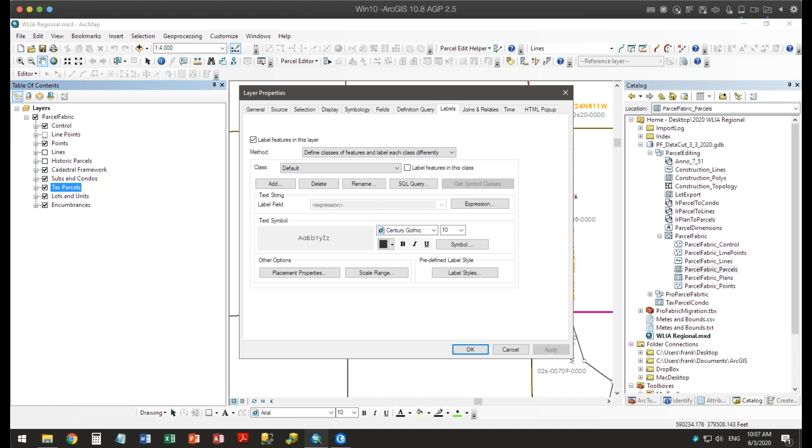All right, so then the question becomes, well, if you have this one layer of nothing but polygons, how can I split that out? And the reality is that in the table of contents, you'll see here's your control points, here's your line points, here's your fabric points and your fabric lines, and then everything else below that are actually polygons, but those polygons have definition queries against them. So if we look at the definition query, this layer here, the tax parcels, actually says that the system end date is null and the type is equal to 7.

And that should give you your first clue that, in fact, the way that you differentiate between the different types of polygons inside of an ArcMap parcel fabric is by an attribute field called type. That attribute field has a domain on it, and that domain is actually stored in the geodatabase, and it's the type field. And here are the various types in the local government information model.

Type number 1 is a PLSS township, 2 is a section, 3 is a quarter section, 4 is a special survey, 5 is simultaneous conveyances, 6 is conveyance division, 7 is tax, 8 is ownership, 9 is encumbrance, 10 is separated right, and 11 is other. Actually, this definition is a result of some work that's been done by some federal committees, and it's sort of documented inside of Nancy von Meyer's GIS and land records book, and that's where they pulled this from. It's a very good data model.

However, because it was developed on a federal level, there's always nuances as far as things that don't necessarily fit local. For example, inside of here, there is a thing called a simultaneous conveyance. A simultaneous conveyance is in fact a parcel of land that has been divided by a private landowner so that they could split it out. And the simultaneous conveyance part of it is the fact that it is defined by a drawing, a graphic drawing that's stored on local government. It is a subdivision plat. It is a survey of some sort, a plan of how these individual areas inside of there should be split up.

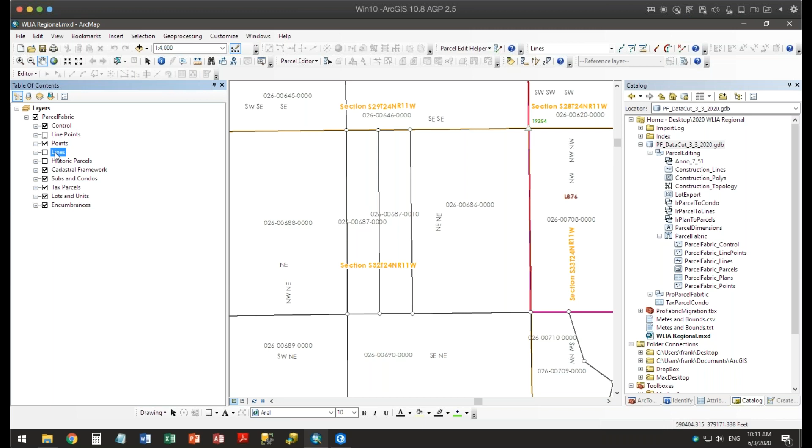And then to break this down further, the way things fit together inside of the ArcMap parcel fabric is that the points, the lines, and the polygons are all related to one another. I should actually say the plan tables are also related. And there's actually a series of relationships, and you'll see them over here in our catalog area, where there's a relationship between the parcels and the lines, and a relationship with the plans and the parcels and such. Many of the other relationships are hidden in here. But the way this works is that the line layer, let's go in and open this up just to show it.

The line layer has a series of attributes, but most importantly is this first one here. All right. This first one here is the parcel ID. This attribute contains a link. So it tells us that, in fact, this is going to the parcel that has an ID of 1.

And as you go down through this, you'll see all the others in here. So this says that this line goes with parcel number 1. And then it says what the sequence is of this line. So this is the first line inside of the one that goes with parcels, and you can see it goes all the way down here. In this case, that's a big parcel. It has 277 lines associated with it.

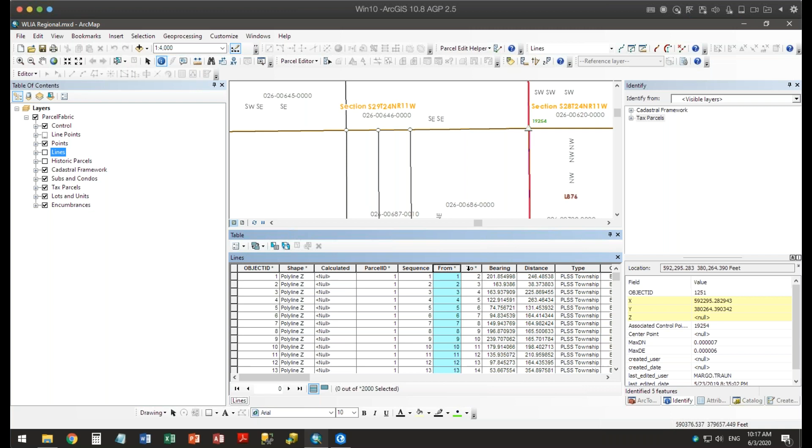So there's good things and there's bad things about this data structure. Another bad thing about it is that while every polygon, every tax parcel probably should have its own set of lines, because that deed only describes that one parcel, what happens when you have a subdivision or a CSM? Because the way those are created is just with a single line describing the split between the two.

Same way with the public land survey systems. They are actually simultaneous conveyances, but they are of a federal level, not a private level. So they wind up having a lot of extra lines in them, kept on top of one another over and over again. So there's efficiencies in the structure, but there's also inefficiencies built in. All right, are there any questions or any comments about the ArcMap parcel fabric before I start describing what the ArcGIS parcel fabric looks like?

Anything in here? Okay. Nothing yet.

All right, so now what we're going to do is we're going to go over to ArcGIS Pro, and inside of here, this is the same structure with the fabric inside of ArcGIS Pro. All right.

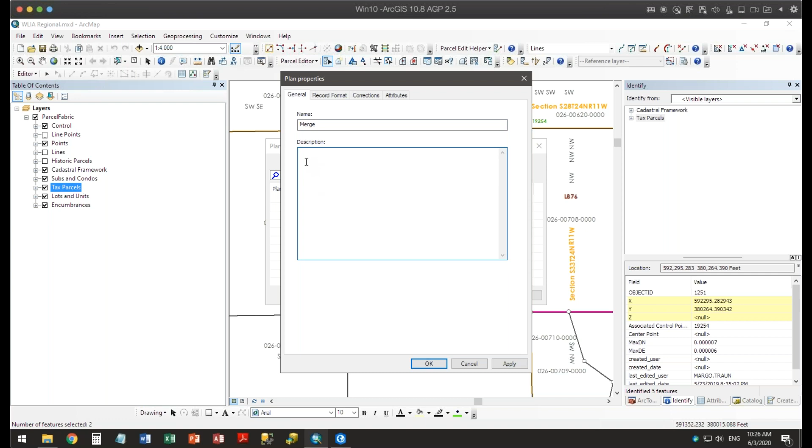Now, the first thing I want to do is create a reference, a plan to say how I want to do this. So I'll go to plan and create a plan. And this will be my merge plan. I can put the description in, what the format is of it. In this case, it's a quadrant bearing, degrees, minutes, and seconds, acres. I can put all sorts of attribution on there, but it's a plan. And that plan is then used to reference anything else that I create with it. So I'll set that as my active plan.

And then on here, I have a whole series of things that I can check. For example, if I want to create a new number for that plan in the name field, I can type it in here. If I wish to use one of the existing ones, I can click on one of these and use this instead. So that's one option there.

If I don't want to mark these parcels as historic, maybe I'm doing this to just fix something. Maybe they should have been the same, or maybe one of these is a sliver. I can check this here and say, don't mark these original ones that I've selected as historic, just sort of throw them away. That's what this means.

And then finally, we have another option down here on the bottom. It says change it to a different template, meaning take these two tax parcels and when I merge them together, make them something else, for example, a subdivision or CSM polygon instead. So inside of what looks like a very simple dialog box, we have a lot of different options. And those of us that have used this can kind of understand what this is. Well, let me go back over here to ArcMap and do exactly that same thing.

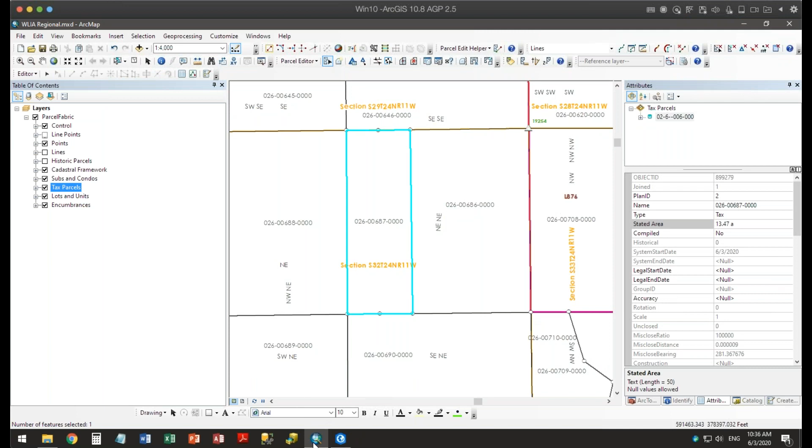So the question is, how is it handling those historic parcels? Because if I turn on historic parcels here, I can see there's my 2 parcels. And if I select one of these, I will see that inside of the ArcMap parcel fabric, there's actually 2 fields. One is called a historical field, which is binary. 0 means it's current, 1 means it's historic, and also the system end date field, which marks when this was changed.

If I go over to ArcGIS Pro and look at the historic polygons, I see there is no historical field. Instead, there is a field called retired by record. And what the retired by record is, that's actually the global ID of this record, which has the merge information on it. So it's referencing everything back to that.

So in order for me to figure out when this happened, I could check through and see, okay, when was this modified by Frank? Or I could go through on my merge record and see what's the date on that merge record. So they perform the same thing, but different ways of going about it, different workflows.

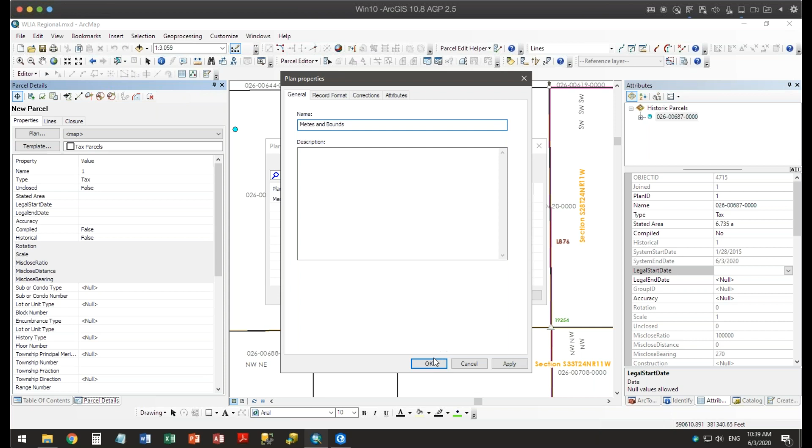Right? And in order to do that, my interface is I click on the new parcel, I go to my plan, thank you. I create a new plan called Metes and Bounds. I then set that as my active plan. I then go and using this new parcel dialog box, I use these tools to first attribute the polygon and then go to the lines and actually input my lines.

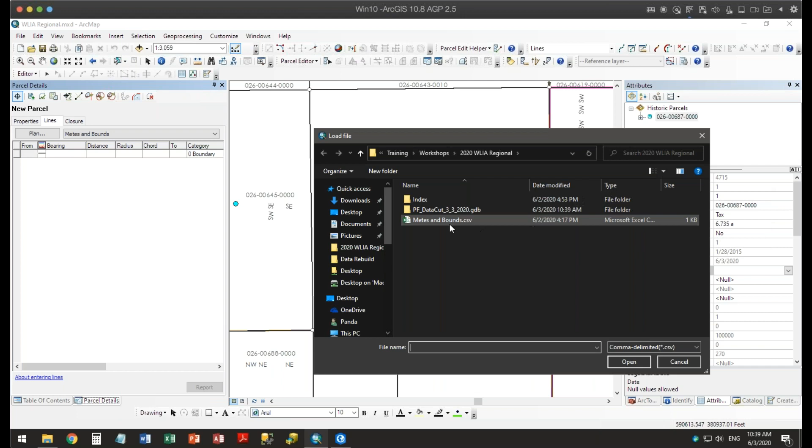It turns out I've actually gone and stored this out here already. So I kind of cheated a little bit on here, but I wanted to put this in and make sure I did exactly the same thing in both applications.

So what this has done is I've input and said the first bearing is north 0 48 51 west for a distance that's going from 1 to 2, 2 to 3, 3 to 4, at which point I have a curve. So at 4, this is my chord bearing. My distance is 0, my radius is 300 feet, and my chord distance is 229.61. And then I have a closing line here, and it will tell me here's my closing, my distance, here's the area.

So the biggest difference is that with ArcMap in here, you have to input everything this way. And you use the tools and the construction grid for that. On here, everything that you have has to have a bearing and distance on it, whether it's a calculated bearing and distance, an inverse bearing and distance, or input. It all has to have its own bearing and distance.

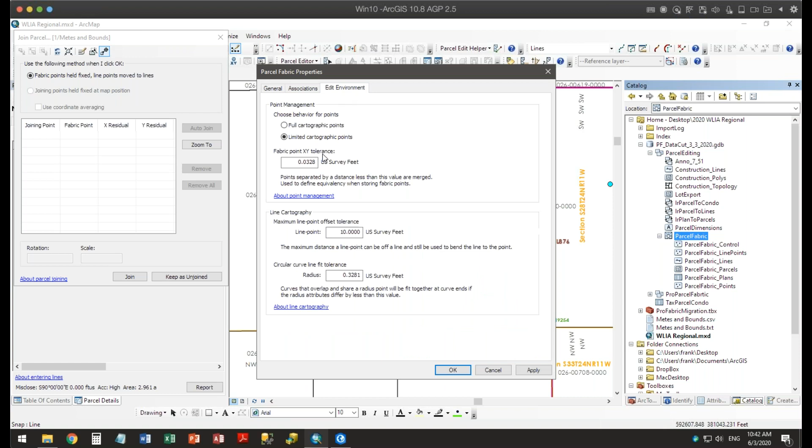I've just realized that inside my parcel fabric... Let me go and correct that. There it is. I'm going to delete that. So let me do that again. And again, I apologize. I should have checked both of these map documents to make sure that they were all set up correctly.

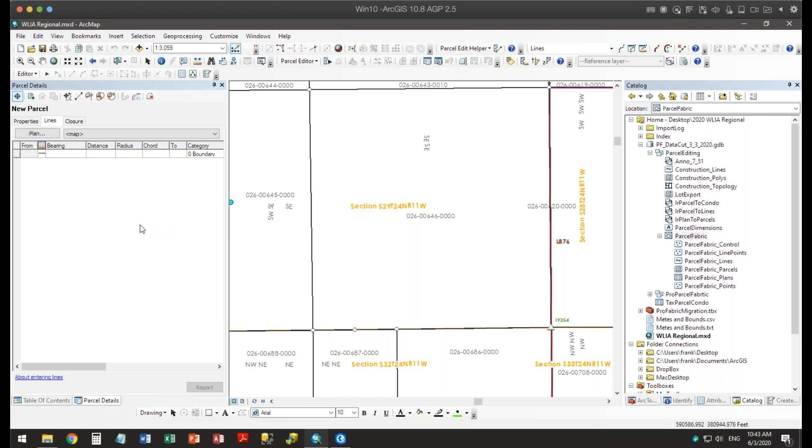I go in here, I set this, I create a new plan. There's my plan. Make that my active plan. And I'm going to load those lines in here. There's the lines. I'm going to say keep it and join it. That should have given me full cartographic. Why am I not?

Anyway, I have this option here where I can say, no, I want to take my new parcel and make sure that it fits here and tell it where to go. So it will take the new parcel and adjust it to fit against my existing ones. That's this top option. And I can then go in here and say, that point goes there.

And then I can say, that's on that line. This is on this line. That's supposed to be coincident, and that's supposed to be coincident. And it gives me two different colors of these joins. This join is the way that it ensures topology or contiguity.

On here, the red ones are when I'm joining to an existing fabric corner. The green ones are where I'm in fact placing it so it's on that line. It creates what's called a line point on there. Another thing you'll notice is that inside the ArcMap fabric, the curve is more than just the actual arc of the curve. In fact, it is the point of curvature, the point of tangency. There's a radius point, and there's two radial lines that are created as part of this. So it's a whole group of them.

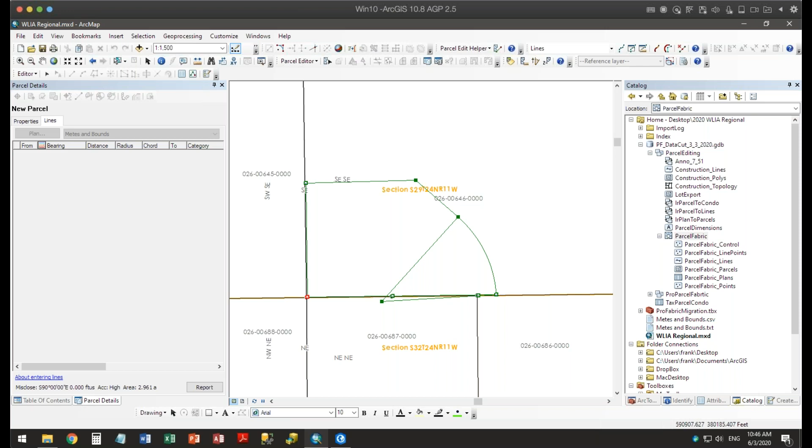Now this joining process is one that's very critical inside the ArcMap parcel fabric. And you have to make sure that you pay attention when you're doing it, because that's actually defining where that parcel is supposed to be located. All right, it defines where that parcel is supposed to be located. I can then go in here and say, well, this actually is, and I can attribute this as I see fit.

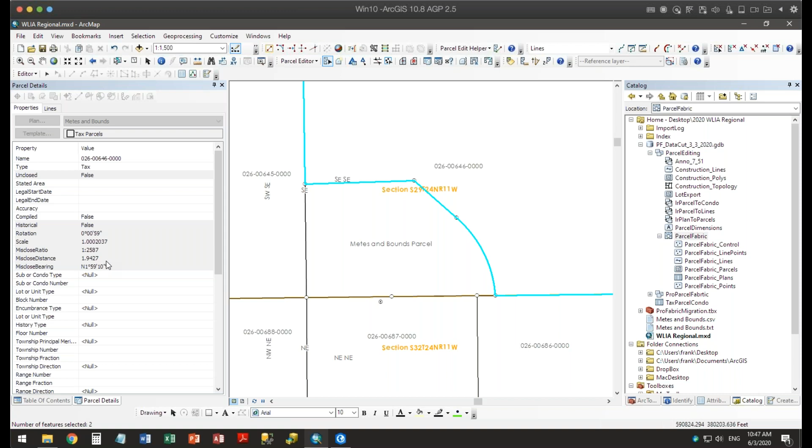I then can tell it what I wish to clip this out of. All right, or in ArcMap terminology, I want to create a remainder. I want to clip this out of, in this case, this other larger parcel. All right. So I can click on, go ahead and do the remainder. And it will calculate that remainder for me. Here is the remainder parcel, and it calculates what the scale was, what the factor was.

If I turn on my historic parcels, I can see that here is my historic parcel. Here is the remainder of it. And those of us that use ArcMap Parcel Fabric are very familiar with this workflow. You create a metes and bounds description, put it in place, and then you join it, and then you do a parcel remainder on here. Right? Any questions on that?

By the way, that parcel remainder gets very tricky, because it turns out that if the parcel that you're clipping it against has any issues with it, then you may get information, for example, the area and such, which aren't valid. You may get misclosures in there. There's a lot of things on there that may reflect that there might have been some problems associated with it. If you're clipping against a multi-part polygon, it's also problematic. It will also give you errors on it.

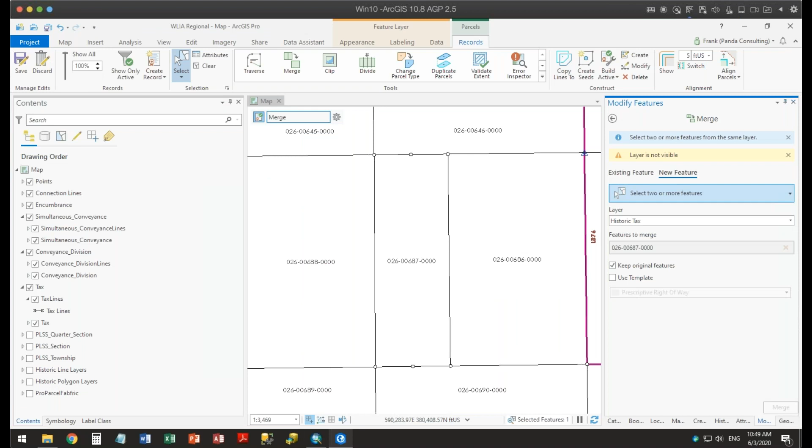So that whole process was never fully worked out inside of ArcMap Parcel Fabric. But for the most part, it was. You learned how to deal with that. You didn't keep multi-part parcels inside the fabric. You dissolved them as you were exporting them out. And you always checked to make sure your misclosures were correct, because misclosure was a big deal on here. Well, inside the parcel fabric, we're going to try to replicate that same thing again.

Are we ready? Any questions, any comments on the ArcMap Parcel Fabric workflow? It was one of those things that would work most of the time, and it would work fine. It worked great, and it was a good process to use, as long as you knew what those little tricky areas were.

So now what I'm going to do is, as I created a plan, I'm going to create a record inside of here. All right. And I now have a metes and bounds record. So I'm going to replicate that. Inside of ArcMap, I clicked on the new parcel. In this case, this is actually sort of new parcel right now. Then I'm going to draw the lines. And on Traverse, first thing I'm going to do is tell it I'm building tax parcel lines.

Now this is interesting, because inside of ArcMap, when I did a new parcel, I had to tell it what type of parcel I was creating. All right. Inside of ArcGIS Pro, you don't do that. Instead, you tell it, here's the types of lines that I'm going to be creating. And because of those lines, it will know, if I create tax lines, then I'm going to be creating a tax parcel. And notice structurally, each of these various layers, the simultaneous conveyance, has its own set of lines.

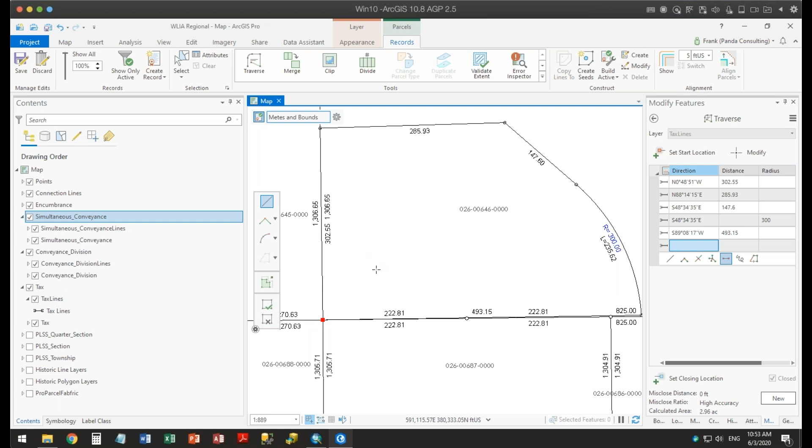So here is my lines for my traverse. And by the way, later this morning, we're actually going to input these lines, so I just didn't want to have to spend the time doing that. So now that I'm done with that, I've actually inputted all the lines in here.

My next step in building this is determining what have I built and does it form a complete polygon. So the first thing I'll often do is I'll say, well, show me the things that I just built, the things that are tagged with this record ID. All right. And it now selected the lines that are part of this record that you just built. And then I'll say, okay, this does in fact look like it forms a complete polygon. Let me go and check it by creating what's called a seed.

A seed is in fact a test. It's a check to see whether or not a set of lines closes back on itself or whether it forms closed areas. Right? That's what the seed does. Once you have a seed, I can then go and say, go ahead and build my active parcel, my active record, and it will go and build it. And in here, here is my built polygon now.

All right. So just as before, I can go in here and name it as my parcel ID, and I can do all the attribution. Notice it does not calculate the stated area on here, because this is in fact intending to be what was shown on that deed. So you actually have to input it.

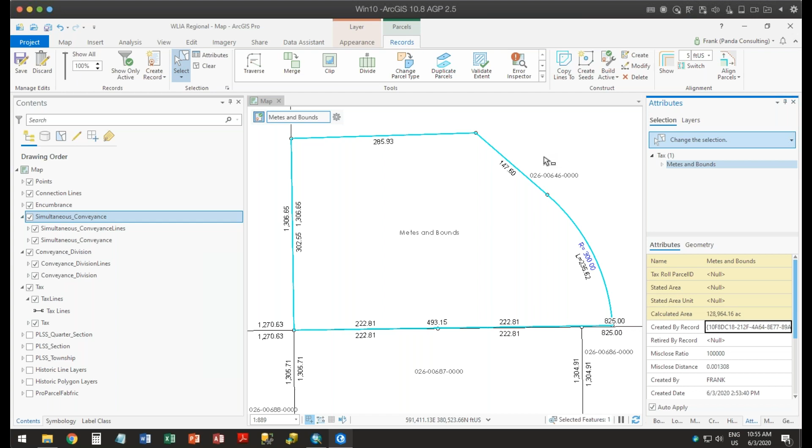But I can see already that this is not coincident with my existing information. So in ArcMap parcel fabric terminology, I have to join it. I have to align it. So I'm going to align it. Now what the align function does is it draws a buffer. In this case, this is a 5-foot buffer and it shows it. If I uncheck this, it hides it. This is the buffer and this is what it's going to go through.

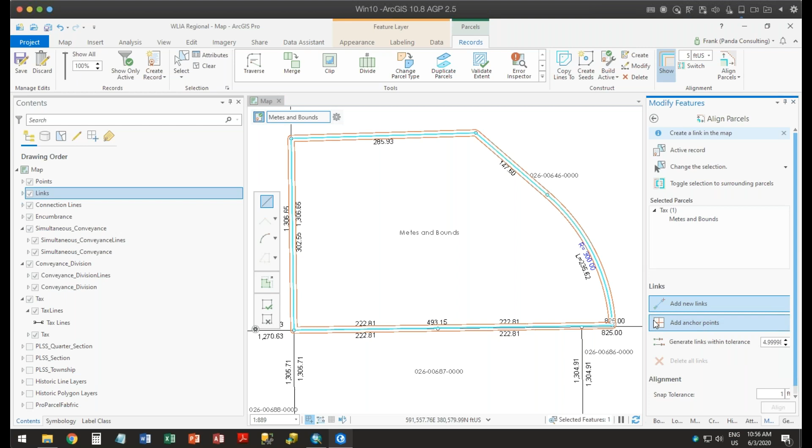I'm going to go in here and manually do some things. For example, I'm going to say that I actually have started here and I wish to maintain that point exactly there. All right. And then I could go in, zoom to all these other areas, add a link and say that I wish to adjust this point to there. All right, and it will create that.

It will actually show me the distance for that point, how far off it is and how far it's going to be moving. I also can do the same thing here where I want it to go to that point, and it'll show me it's 2 foot off. And here I can create my link.

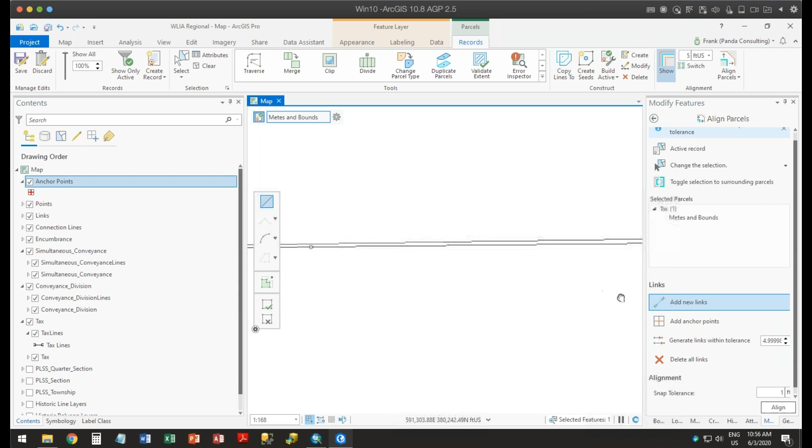And in here I can create my link. So this is analogous to doing that join. And in this case, whatever is selected is going to be adjusted to fit those surrounding parcels that are not selected. So I could actually go and change my selection and toggle between this and the other ones, depending on which I felt was more accurate.

I also, just to let you know, have this means by which I can automatically generate those links. I still am a belt and suspenders guy. I want to do it myself. I want to make sure that this is where I want these things to go. And then finally down here, this alignment thing tells me that if I have any vertices within this buffer, in this case this is set to 1, to go and snap them together. So this is the align parcel functionality inside of the ArcGIS Parcel Fabric, by doing these alignments here.

So the join, I tell it what gets adjusted, whether it's this parcel or the surrounding parcels that get adjusted to this point. I tell it what to hold and what to adjust on here. The links that I draw are not directional. It just says, okay, take this and move this to here. All right, so it just signifies that those are endpoints, but it shows me, in fact, what and how far it's going to move.

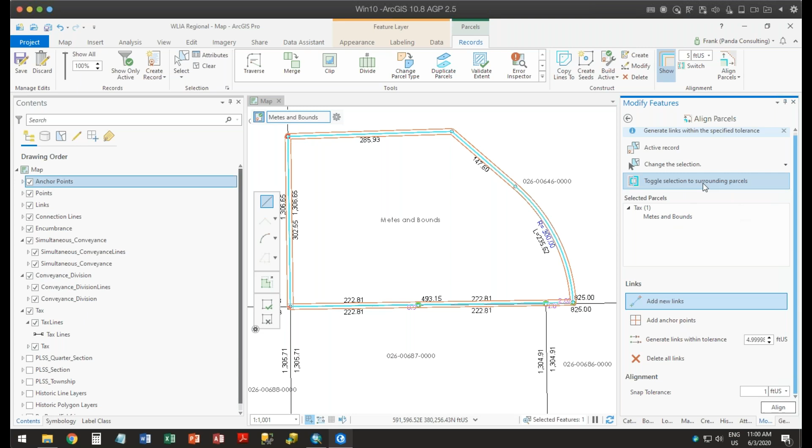And I shouldn't say points to be moved. In the initial one, if you have your record features selected, it will move the points. But if I go the other way, for example, if I toggle this to the surrounding, let me unshow this. Now it's going to move the surrounding things to the active record. So whatever is selected, that's what gets moved. All right.

And this isn't as it used to be in ArcMap, where basically you did that once and then that's it. It might be that you have to go and do a couple different adjustments if you want directional. If you want certain things to go some way and other things to go the other way, you can iteratively go through this and do that. So I'm just going to go in and now click align, and it will go and make that alignment for me. And it will adjust everything to where I had told it to go.

All right. Are we good with this? There should be a bunch of questions here, by the way. Yeah. None other than Eric's.

None. Okay. So again, in looking through the ArcMap, it was create the boundary, then go and join it in place. And that join is what we just did. We created the lines, made sure they were closed to create the seed. Then we created the parcel. The lines were already there. And then we aligned it. In essence, we put it in place where it's supposed to go.

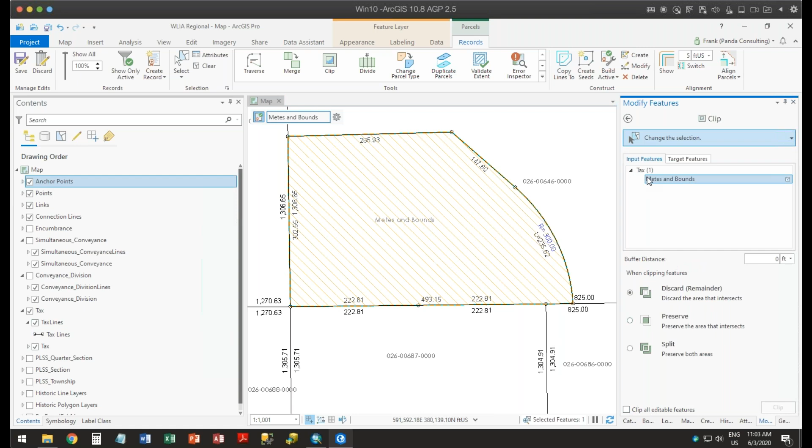If I didn't use this, I could turn that off and say, okay, here's the parcel that's my input, and then I can say, okay, now go ahead and figure out everything you're going to clip on here, and it will list everything that it is going to clip. Now these other parcels, by the way, are because it's right on the boundary. It uses a little tolerance to search and finds everything that's on that boundary in case it does have to clip it or not.

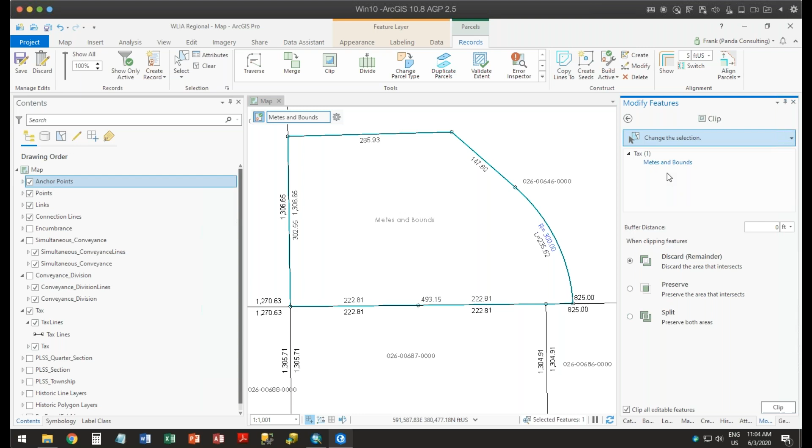Again, I'm not going to use that. I'm going to use the easy way of doing this. But if you want to really control it, you can uncheck that and say, clip this, don't clip this. Clip this, don't clip this. I'd rather make the software intelligent. All right. So there it is. I can say clip this, go ahead and clip it out.

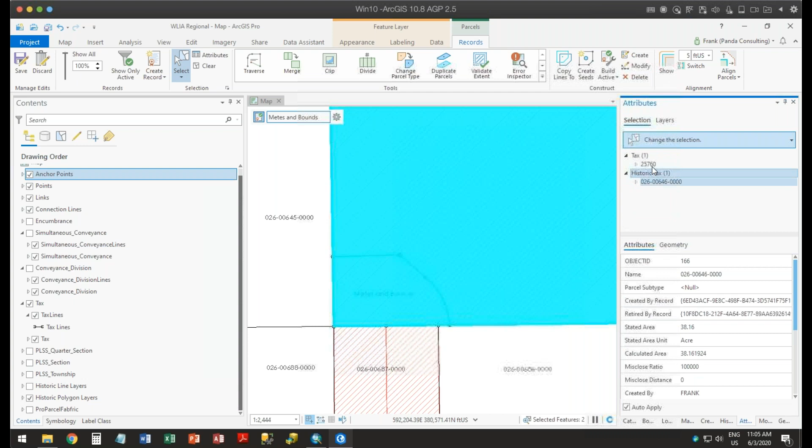All right. So when we're done now, let's see. I can clip on this. Let's turn on the historic parcels and see. Here's my new parcel. Here's my old parcel. Now notice one of the things that it doesn't do yet is it doesn't keep the attribution and recalculate all the other stuff on there. What we recommend is that we just copy and paste right now to do that, and then make sure that we update the calculated area and stated area on there.

All right, so that is a metes and bounds parcel. Taking it and inputting the traverse, putting it in place by using that align, then clipping it against your existing layer and making sure that it's valid. Not a huge bunch of differences. However, the difference is you're using different tools. For example, you are inputting lines and then checking to see if the lines are closed, and then building it. Whereas with ArcMap, you never really input lines until you said build that parcel, right?

So just as a little diversion now, what I want to do is explore a little bit more of that alignment, just to show you what really is happening here. So if I go in here and say, let's create a tax parcel here, I'm actually creating a polygon now. I'm not doing lines. I'm doing a polygon. And there is my polygon.

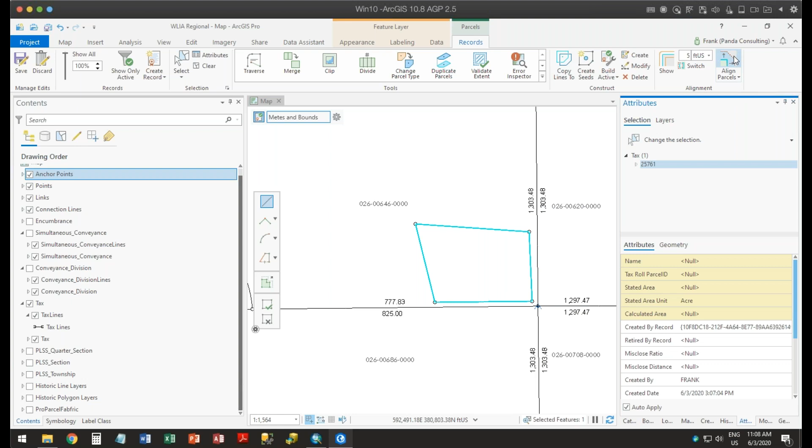All right, so now let's go in here and do this align again. In this case, I built it quite a bit off, and I really don't care about showing that because I'm going to go in and do some other things. First thing, let's go and move this. Let's move what I have here, and I'm going to move this to here. I'm also going to make sure that I move the points with it.

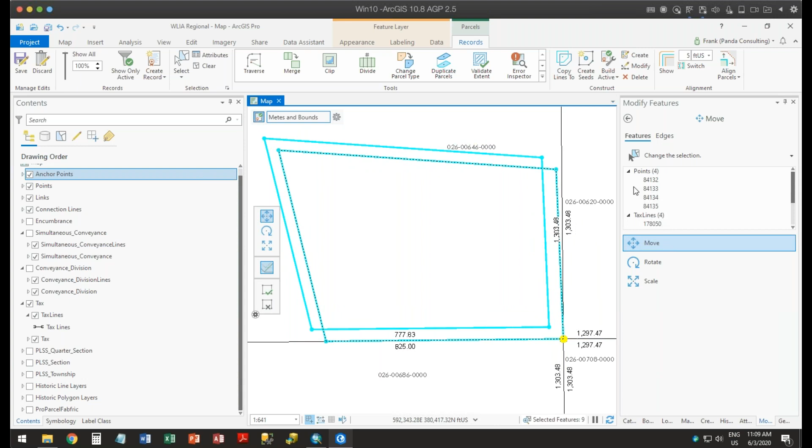All right, so back to move again. I'm going to move my anchor to here, and I'm now going to move it so it snaps there. I click on the plus sign to finish that. So I've now moved it to where that should be. I'm then going to click Align Points, put an anchor here. All right, just to verify there is an anchor here.

Then I'm going to add my links, and I can control where that link is supposed to go. I can actually say go ahead and generate and see if it created one. It did not create one here. Let's go and put one there. And tell it to go ahead and align this. Now it's aligned this in here.

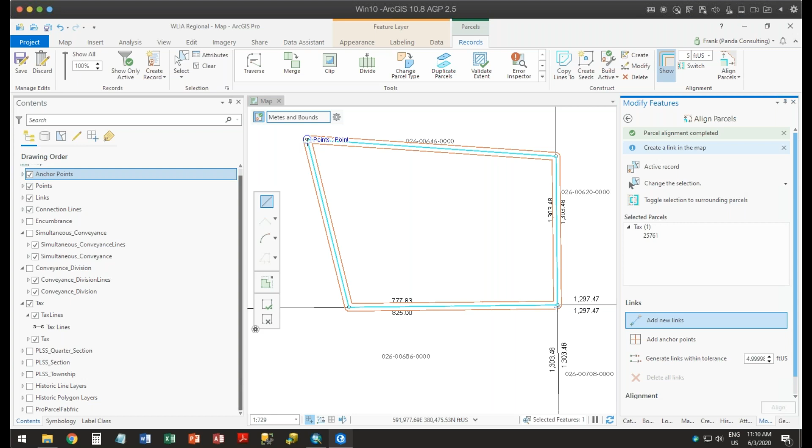I didn't make that huge, but it actually will move this corner here relative to the way everything else moved. So it's not just moving those lines, but attempting to create and maintain that same geometry as it goes around. So again, it's not just moving lines, but it's actually attempting to keep that geometry as much as possible.

No questions on there? Nope. Good. Okay. Let me go in here and go to there. So I'll undo all of that. There we go.

Simple workflow. If I'm going to do a new parcel, I create a record. I either create the lines and then create the seed to make sure it is a closed set of lines, and then build the parcel. Or I use the polygon, build a polygon and then build it to make sure that it creates the lines and the corners for me. Move it into place, align it so everything is coincident, and then I can do a clip.

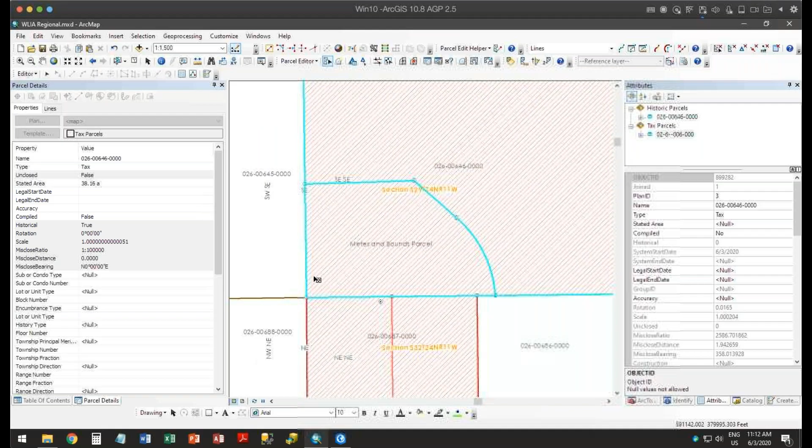If there are no questions, let's move on to the next thing, which is, oh, actually, I guess I didn't have one here. I think what I'm going to do, I had a bookmark here for Aliquot. All right, I'm going to use this parcel here and build something Aliquot off of that.

So inside of here, normally what I would do is a right click and a construct from parent. And with that construct from parent, it basically takes my existing parcel, the one I had selected, marks that historic because I'm making the same thing as what it was, and then allows me to build these new things from it.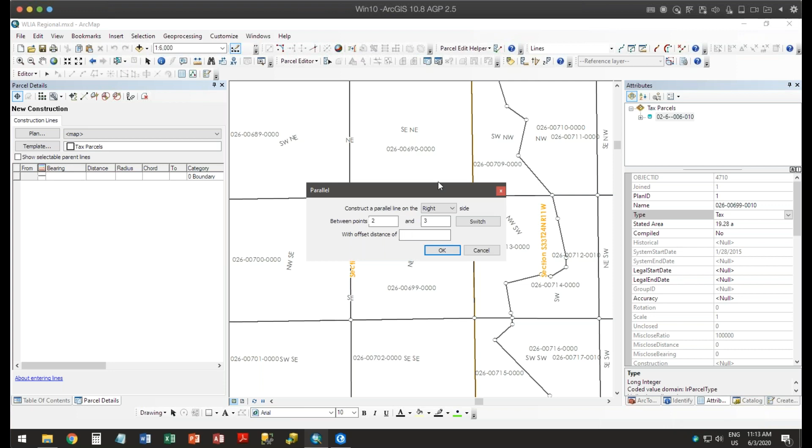So what I'm going to do is go parallel. I'm going to create a parallel offset to this line. Starts here, goes to here, and I want to be, let's say, 500 feet on the right side of that. And it will take 500 feet. It will build that line across.

It took these two lines, took this line and marked it so that it wasn't going to use that line anymore, and created a new line from 3 to 6, and then a new line from 6 to 4 on this side. On the west side, it took my existing line and said, don't use that line anymore. Instead, use the line from 2 to 5, and then the line from 5 to 1, and use that for my new construction.

So it takes those lines, marks the old ones as old, not going to use them anymore, and then creates the new ones to replace them and builds them out. I then say, go ahead and build it.

Builds those two new parcels for me. Marks the old ones historic. All right. I forgot to create a plan. I should have done that. Sorry. I should have created a plan first, but I didn't. I get too wrapped up in it.

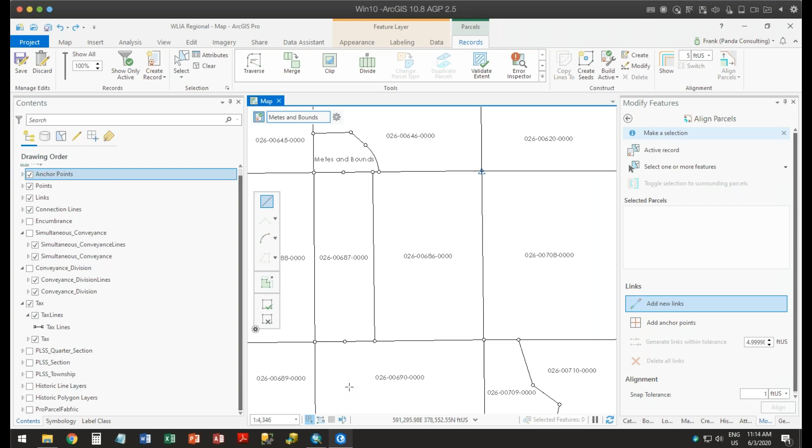So let's go in here and let's first show something that we haven't shown yet. And so inside of here, I went and copied the parcel ID of that other parcel. That's how quickly it goes and locates things inside of ArcGIS Parcel Fabric. Using this locate is now a replacement for the find command. All right.

So what do I need to do? In this case, I'm going to go and create a record, and I'll call this Aliquot. Attribute it as I need to. By doing that, creating a new record, it automatically closes the other records out for me. All right, it's not going to do any more work on that. So now I have a choice. What am I going to do with this? I have two different workflows that I can use to go and build this.

The first thing I can do is I can say, okay, well, let's copy these lines. Take this and copy these lines. I'm going to create a tax line. I'm only going to show the lines that I copy, and I'm going to create a seed that contains the attributes of my existing. So inside of ArcGIS, you can consider this the construct from parent. I can go and take this if I really want to. I can take this and I can go and say, let's move that down to here. There it is there. I'm good.

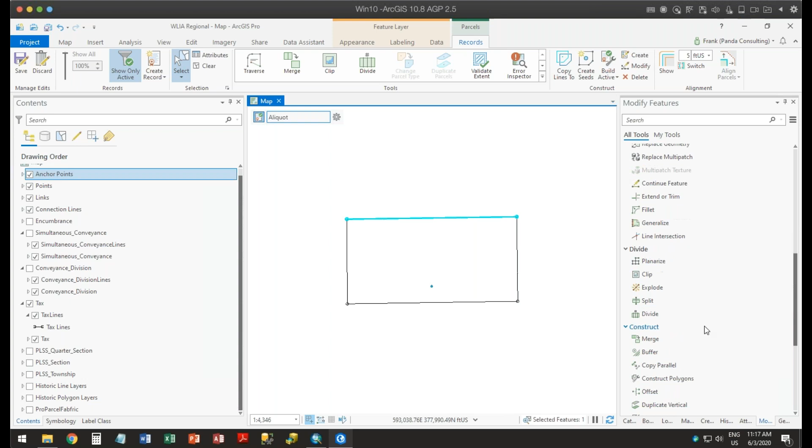All right. Now my question is, how am I going to build this? I need to be 500 feet south of that parcel, or south of the north line. So I can take that north line and say parallel. Copy parallel. All right, and it will show me what direction it is in, and I want to go and build a new tax line. I don't care about keeping those original ones on here, and I can tell it I want to go 500 feet, but I don't want to go both directions. I only want to go on the left-hand side. So it allows me to go and copy that parallel.

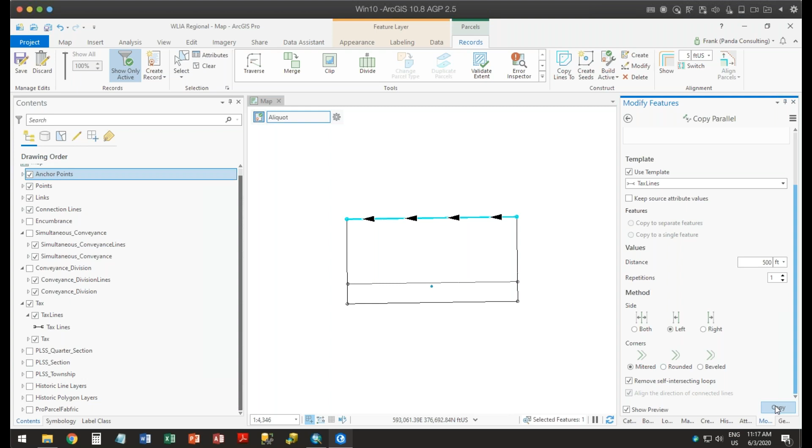And when I do that, you'll note that it literally copied that whole line there. It didn't do any extending or trimming or anything else on there. It just copied that line. I then can go and say, well, extend and trim this, and say, clip this out, and then take and extend that line till it intersects with that.

So I can do extend and trim, and you'll note with ArcGIS, you have this ability to go and extend and trim without having to select the line that you're going to actually be extending or trimming. It just looks at what you have in there using map geometry to go and do that. So I now have my lines drawn. Now, one of the biggest differences is that this did not split those lines on here and here. It did not split them at all. So the question is, well, do I want to split them or not split them? I'm using those.

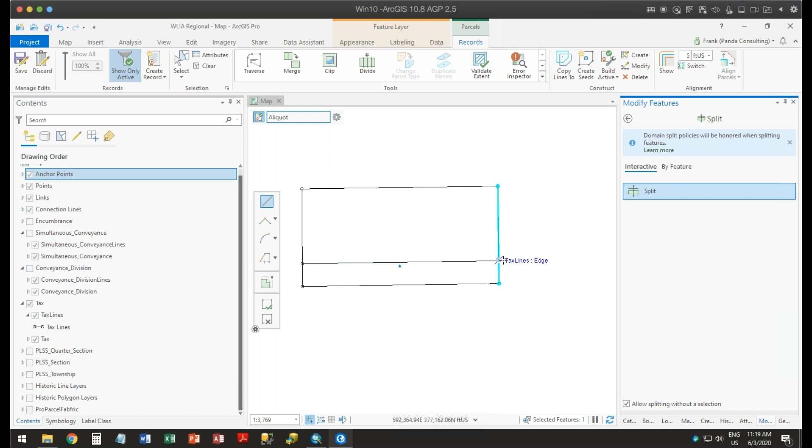The legal description says the north 500 feet of this parcel. It doesn't say come down along the east line 500 feet. Doesn't say come along the west line 500 feet. So the question becomes internally, do you wish to record that as being 500 feet, or what do you want to do with it? If you wish to split these, again, you can go in here and then say split this here and split that there. All right.

And you can split it, but you don't have to split it with the ArcGIS parcel fabric. You don't have to split that. As long as those lines are closed, as long as they come and meet up with existing lines within this record, it will form a polygon and allow you to go and build it from there. So now I can say create the seeds just to check and make sure this is closed. Here's my other seed. Here's the first seed with the parent information on here.

I can say build. Once I say build, it will build these two parcels and then turn on the other layers for me, or turn on the other components in here for me, so that these are now reflective of what? And it will mark that existing parcel, that original parcel, it will mark that historic for me.

All right. That's one way of doing it. In this case, it's fairly easy to do. But what if I had south 500 feet, the east 200 feet of this? Well, I could have selected these two lines and said copy parallels, and it would have gone 500 feet this way, 200 feet this way, and done the same thing. So I could have created those lines in here.

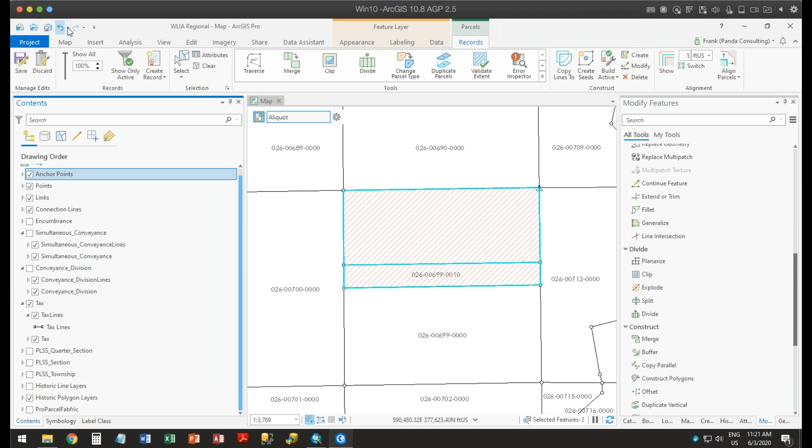I'm going to actually go back to here. All right. Go back to here. And then on this record, I'm going to select just the polygon to show you I only have the polygon selected on here. And now what I'm going to do is I'm going to take the polygon and divide it.

And the divide tool actually has some very interesting functions, depending upon whether I divide a line or divide a polygon. If I divide a line, it tells me, okay, I can divide it into a set proportion. I can divide it into proportional areas. I can do a set number of distances. I can do varying distances. But when I have a polygon, it says I could do proportional area, or equal width.

And I can say I want to do equal width, and then I want to go 500 feet on here. And then I want to tell it, I want to use that line as my dividing line, and say, go ahead and divide this polygon for me, if you will. Just to go and build, just to make sure that I've got everything in there. I actually have now gone and split an aliquot north 500 feet of that polygon for me.

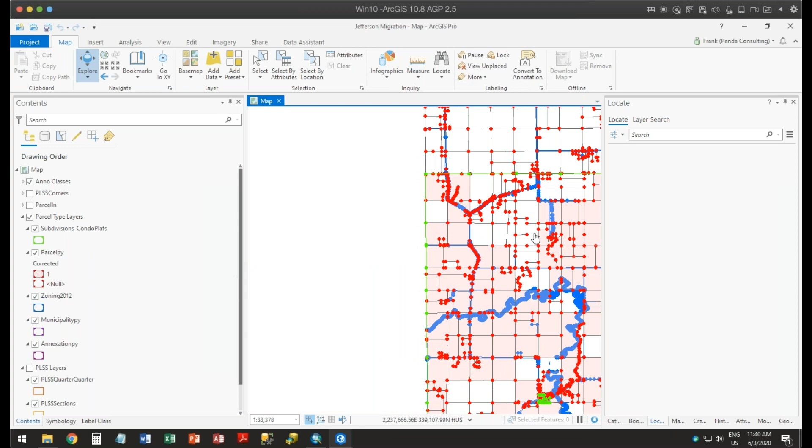So I'm going to open up a project for a client that we're right now doing some work on to clean that up, just to show you the tools that you would use to do that. So this is in fact Jefferson County. Let me see if I can find some areas here. So inside of ArcGIS, I am now symbolizing it because ArcGIS has that capability to show me all the vertices. And you can see they didn't know they had all these densified curves. So you have to go and fix all these densified curves. So there's a function inside of here called align features.

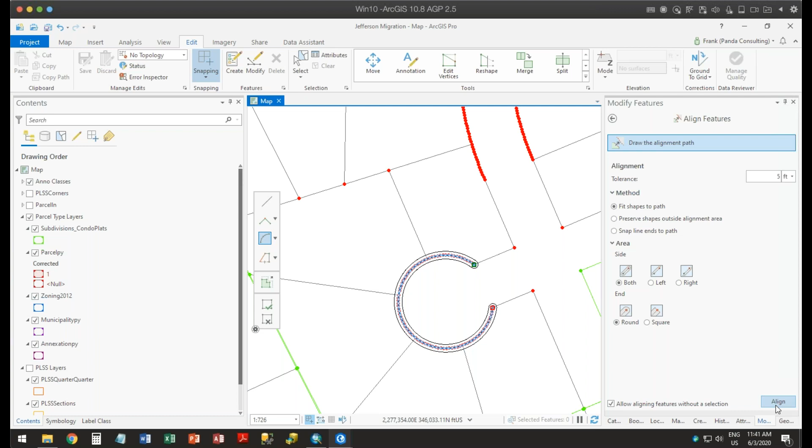And align features will allow you to go in here and take these densified curves and draw a new path and say, take every vertex that's within my buffer, my tolerance of 5 feet, and move it and replace those lines and replace those polygons with this new path that I'm drawing. So it will go in here and say, okay, take all those densified curves and replace them with a single curve, a true geometric curve.

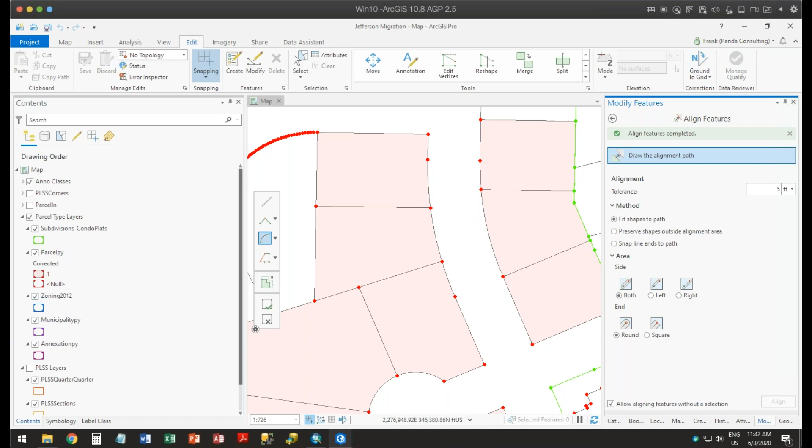So that's exactly what this is here. All right. And again, I do this a lot. It looks simple. It's not as simple because there's all sorts of little gotchas in here. Chris especially is doing this on a lot of our clients' work. It allows you to have the capability of not just cleaning up a single layer, but actually looking and comparing at layers that are stacked on one another. So if you have a misalignment or what we call vertical alignment issues, it allows you to fix those at the same time, together with fixing all those curves.

So if you have tax parcels and you have lots and you have subdivisions and you have zoning, and they all have densified curves on them, this will allow you to take one curve and fix it on all of those layers at the same time. So there are tools inside of ArcGIS to allow you to clean that up. That is horrendous inside of ArcMap to try to do. So that was the first point about densified curves and whether or not you have quality data in there. It's not as horrible inside of ArcGIS as it is in ArcMap.

And with the fabric, you don't suffer a penalty because of that. It's still there. You still have to do it. Matter of fact, if you bring it into the fabric, it will automatically create lines and points for you. You have to clean them all out before you go and fix those curves and then rebuild them. But it's easier than if it's in ArcMap. That's the second point.

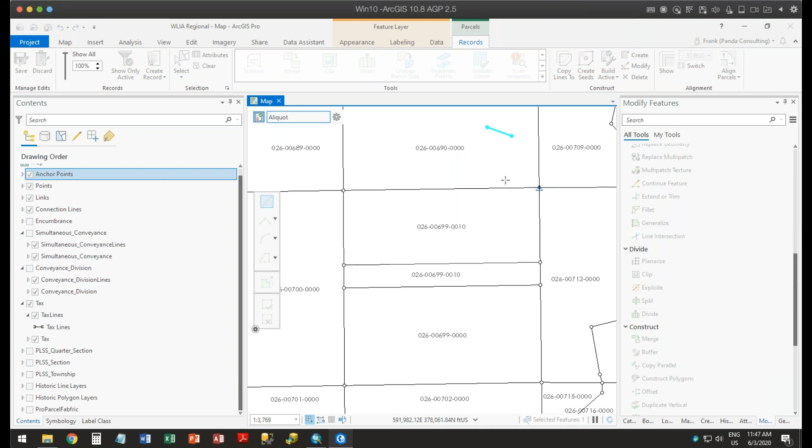All right. Let me make sure that I get off of this. It's a bunch of 2-point lines is what they are here. All right. So what I'm going to do is I'm going to select all those. I'm going to unselect my polygon, and I'm going to merge those 2-point lines into one line.

All right. And that's basically the same thing that happens. It's a merge. It's not necessarily a realignment. If you're talking about, well, how do I correct gaps or overlaps between them? Yes, the realignment tools inside of ArcGIS are amazing. There are things such as the align features, which is what I just showed you, where it says basically take all of these and give them this new shape.

There's also things like align edge, where it goes and says fill in the gaps. Make sure there's no overlaps, make sure there's no gaps in there. And that's an interactive tool in here. There's a lot of tools to go and clean up the data inside of ArcGIS. So by all means, you should be using them.

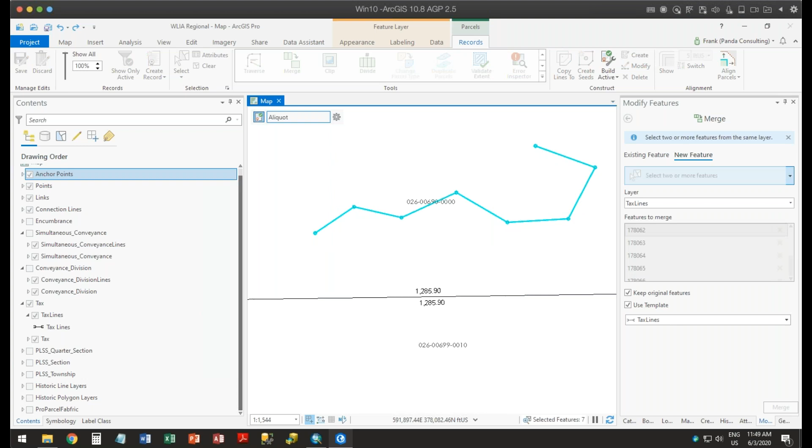So go ahead, Joe or Chris, some more. Mark has a couple questions here. First, is there a cheat sheet out there for how to do splits, merges, rejoins in Arc Pro, the stuff that we covered before the break? No, there's not a cheat sheet. It's one of those things where as I'm going through and teaching people about this, I understand it's a new way of looking at these things. There isn't a specific cheat sheet.

I know that Esri has come up with some new training courses for this, but when I'm looking at the syllabus on them, it doesn't really go over these. These are just simple editing things. I've actually thought about, maybe one of the things that we need to do is come up with a workflow, because these are decisions, but each of the situations call for different decisions. As I showed you with that aliquot, if it's a straight line one way, maybe you can use the polygon. But if it's multiple ways, maybe you use the lines. So it's like you've got a decision tree you're going through, but there isn't specific cheat sheets out there yet.

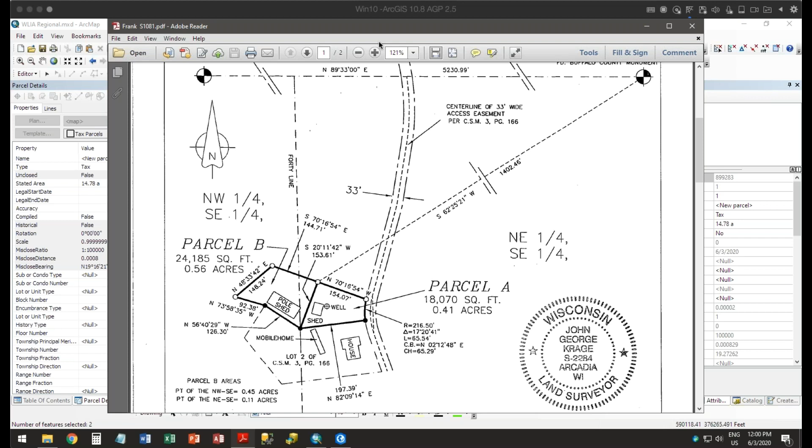All right. Any questions before we start? Nope. Doesn't look like it. So I did cheat by having at least a bookmark for it, so I wouldn't have to go and find it.

So again, it has an origin connection, starts here, comes down over to here, and then goes around here and forms the plat of survey. Then I'm going to do a construct from parent to split it into lots, and I'm going to take those lots and duplicate them to become tax parcels.

First thing I want to do is go to new parcel and set a plan. It doesn't want to do that, so I'm going to do it this way. Plan directory, I'll create a new plan, and this is called S-1801. These look fine. There it is. That's my current plan. And I'm going to create this and use S-1801.

I'm going to change my template because I don't have it inside of here. I'm going to create this as a sub, even though I know it's not a sub. Double check the plan again. It didn't take. Interesting. Yeah, it is interesting why it's not doing this. I could see it there. It just doesn't want to hold that.

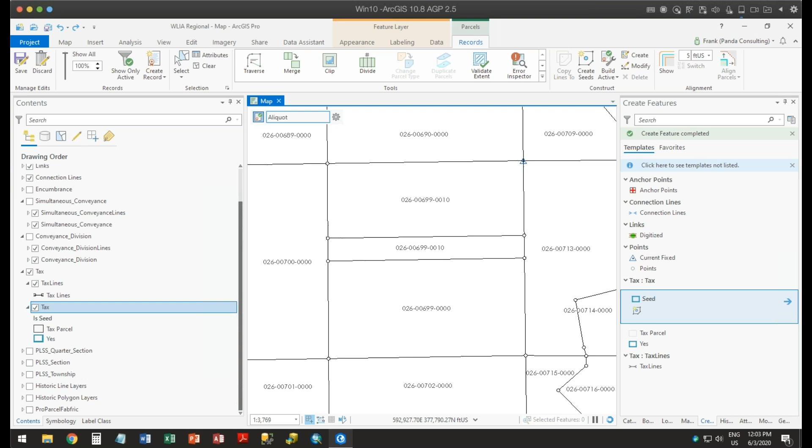And I go in here, huh, interesting. Can you close it out? I can close out ArcMap completely. Let's try this one more time. Actually, thank you, Christopher, because I've run into this before, and let me do that also with ArcGIS Pro. If it goes in and out, it often has problems. It's also exacerbated because these are both using the exact same file geodatabase, so there may be linkage problems.

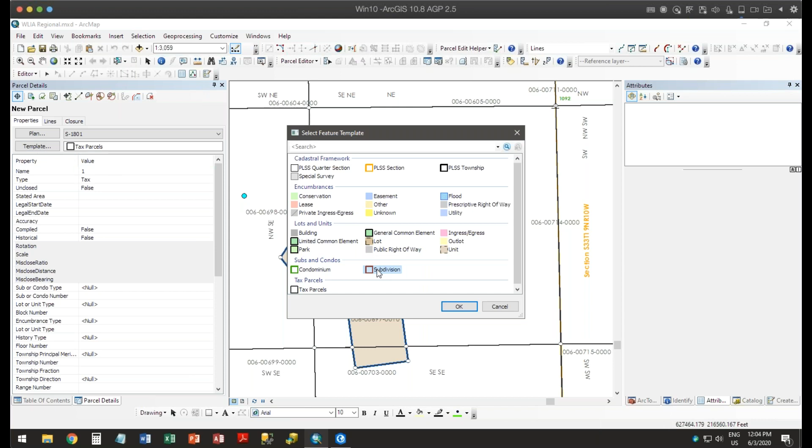Okay, so let's start this again. Go over here, start editing. Go in here, do a new plan. That's my current plan. There we go. Set my template to sub. There it is. S-1801. Thanks, Chris. No problem. Then I'll start with the lines.

I will start here, and my bearing is 62, 35, 21, southwest, for 1402.46 feet. Let's make this a little bigger on my screen. And that is not a boundary; in fact, it is an origin connection line. So now I'm at the point of beginning. By the way, that's how you change whether it's part of the boundary or part of your origin connection lines inside of ArcMap.

This is now the point of beginning of this parcel, and I'm going to start inputting it. 70.1654 in a southeast direction for 154.07 feet to a curve. The curve has a chord bearing of 2 degrees, 12 minutes, 48 seconds southwest, a CB. The radius is minus 216.50; it's a radius to the left, so it's minus, and the chord distance is 65.29. Now let me continue putting the boundary in.

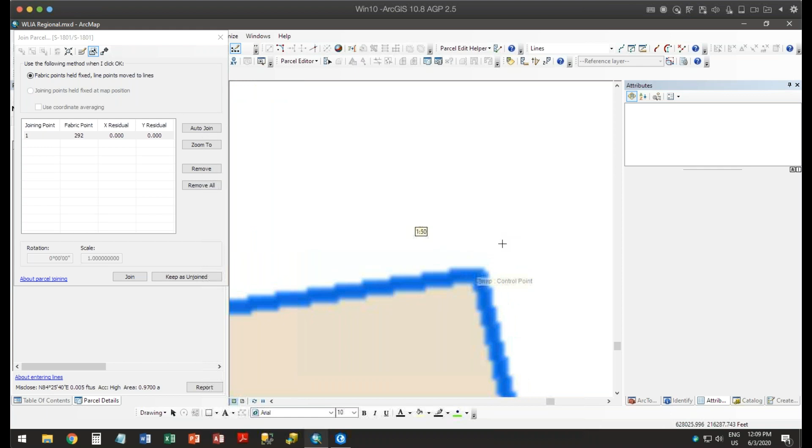And I'm going to go in here and join this here. This here. And then this here. No place else to join it. All right, so I am comfortable with that. So I'm going to go ahead and join.

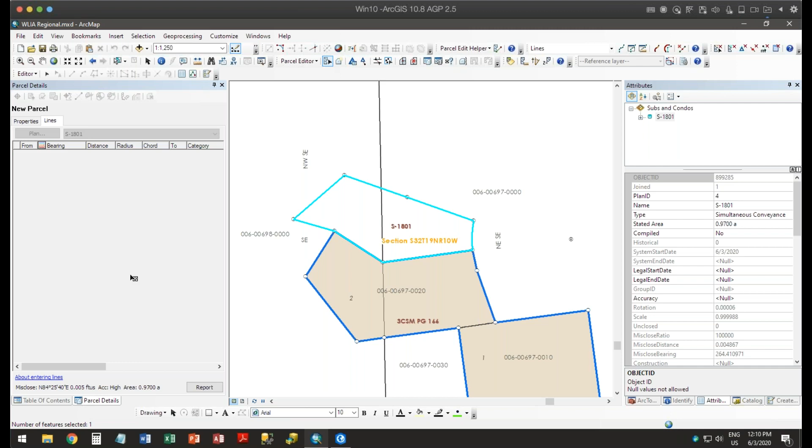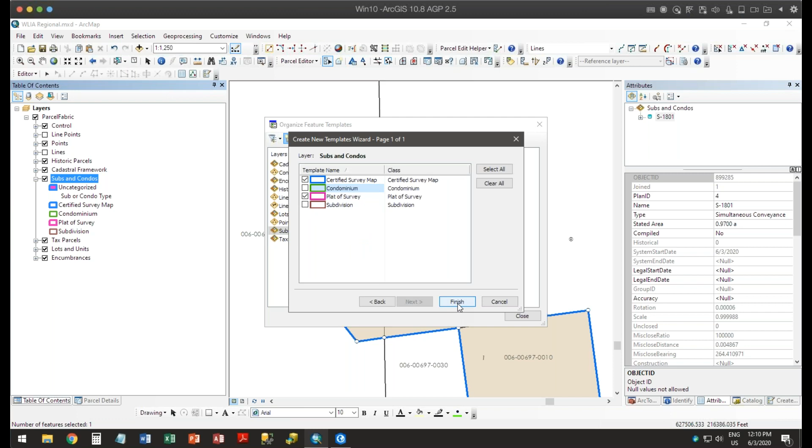There it is there. And again, I think I only have that one type in here. I don't have my plat of survey. Oh, I do. I don't have a template for it. That's it. Let me see here. Any templates here, here. I already have sub. I already have that. Finish there. So now I should be able to go and make this plat of survey. All right.

All right. So I think I'm now done. There are no subs underneath here, so I have nothing to go and do parcel remainder from. I'm good with that. Everybody good with that workflow? This is normally what I would do. I would go in here, do it, create the new single plan, build everything underneath that. My next step is to go and build the individual lots out of that.

So I would take my cursor, go and say construct from parent. All right. And this time I would go and say I'm constructing lots out of here. And I actually have a line that goes from here to here. I'll go and compare it. Actually, the bearing is supposed to be 42 here. And this is 6.1. I can then say go ahead and build and keep my subdivision, my plat of survey as current, and go ahead and build that out.

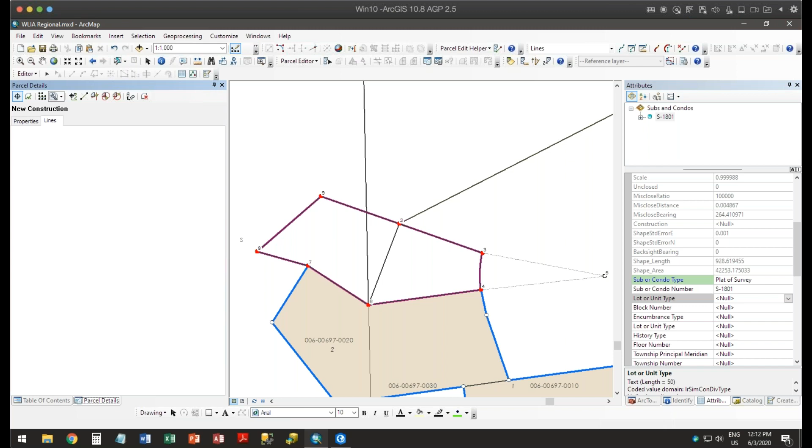There's my two parcels. This one here is actually parcel A, and this one is parcel B. All right. We're still good with that, right? Perfect. All right, so my next step then is to go and make these both tax parcels. So I would do a duplicate of these two onto tax parcels, and I would duplicate them as joined and build them in there.

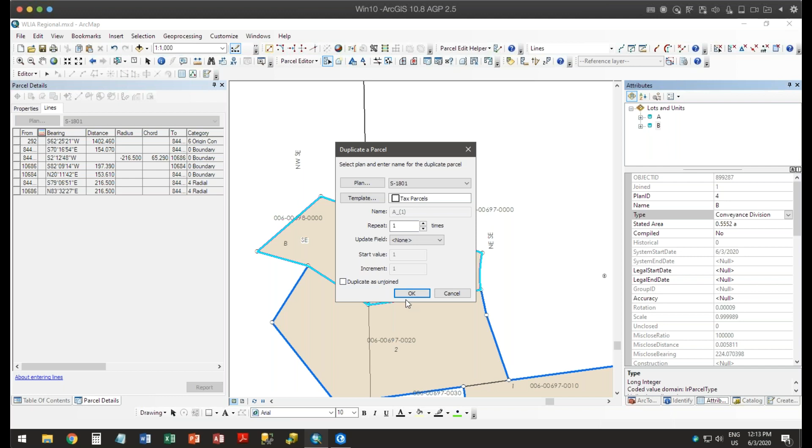And I'm just going to mark these here. Parcel A, parcel B. All right. Then finally, all I need to do is a parcel remainder. And in this case, I don't want to go against the sub. I don't want to go against the other two joins, and I want to have it create new parcel remainders for the other. And it should.

There's my new parcel here. Here's my new remainder parcel here. All right. So one of the things we have found here is that this seems to be a fairly straightforward workflow. Once you learn the tools, it's pretty easy to do. It works you through. Once you learn how to use those tools. And this is, again, 10 years worth of production, a couple years of development before that. So this is a mature product.

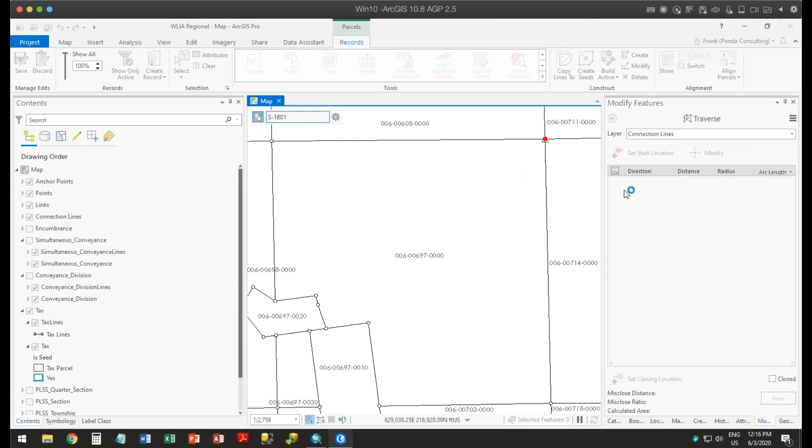Again, the record will serve to keep track of everything that I'm doing. Then the next thing I'm going to do is a traverse. In this case, I'm going to create not an origin connection line anymore, but I'm going to create the connection lines inside of the ArcGIS Parcel Fabric. Those origin connection lines are not connected to the parcel. They are in fact referenced as part of a record.

So 62.2521, and that's southwest. And the distance is 1402.46. All right. So an interesting part is that a difference between the ArcMap construction grid and the ArcGIS Traverse tool is that the ArcMap construction grid builds nothing until the very end.

The ArcGIS Traverse tool, every single time you hit enter, puts a line in place. So this is not creating a network of vectors. These are individual lines, getting created every single time. So one of the complaints I've heard is that this traverse is not as fast as the other traverse because you can type things in pretty quickly there.

And in here, every time I hit enter, it's creating a new line for me and drawing that new line for me. So yes, there is a difference between these two, and you need to be aware of that. The ArcGIS Traverse function creates lines as you're going. All right, let me go in here now.

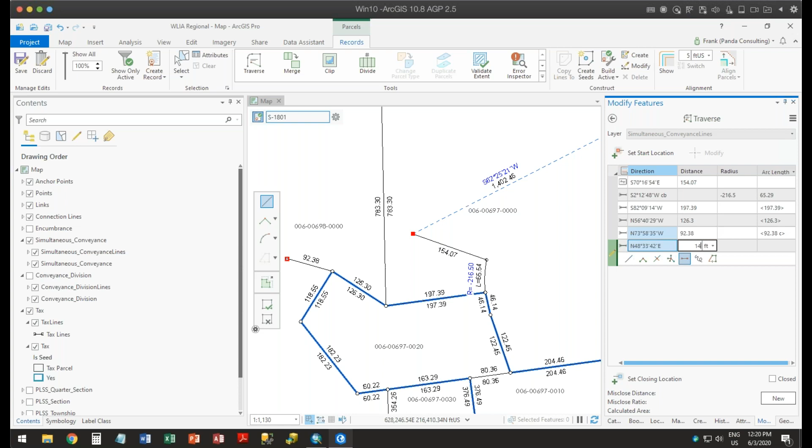All right. I now have, I don't know what's going on here. 73.5835 northwest for 92.38 feet. 48.3342 northeast, 148.24 feet, and then closing back 70.1654, and then southeast for

154.07 feet. And in fact, it tells me I have a misclosure of 0, and I come up with exactly the same area included inside there. So with the traverse tool, I put the lines in. I haven't done anything else. I've just put the lines in here.

So now I can go in here and say, all right, now let's create the seed. Make sure here's the seed. And again, this is creating a seed for my simultaneous conveyances. So there's my seed. I can say, go ahead and build this out. And it built that on here.

So now S-1801, and it is a plat of survey. Stated area 0.97 acres. All right, created it. It's done. So I could use the same record just like I used the same plan in the other, and now go and create

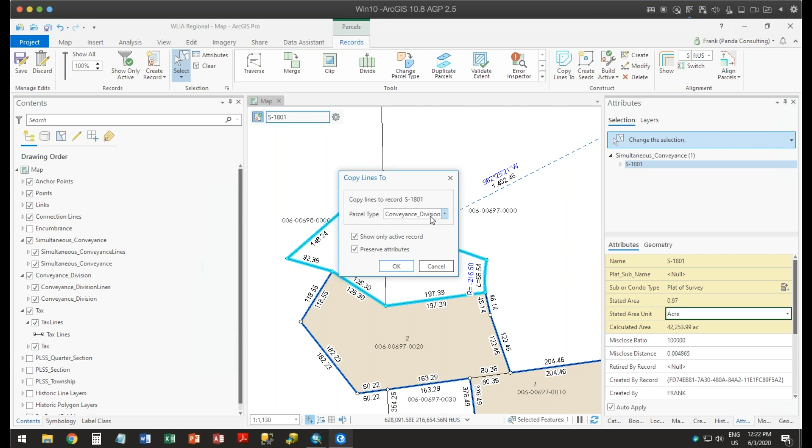the lots. In this case, I want to turn these lots back on, and instead of construct from parent, I'm going to say copy lines to the conveyance divisions. And I really don't care about preserving it, and only show me what's in my current record.

And again, that "show me what's in the current record" is basically just to make it easier for you to see what's going on here when you do this. So now all I have to do is, I've got a line that goes from here to here. So I go in here, conveyance division line, and say here to here. Let's go ahead and put in my direction,

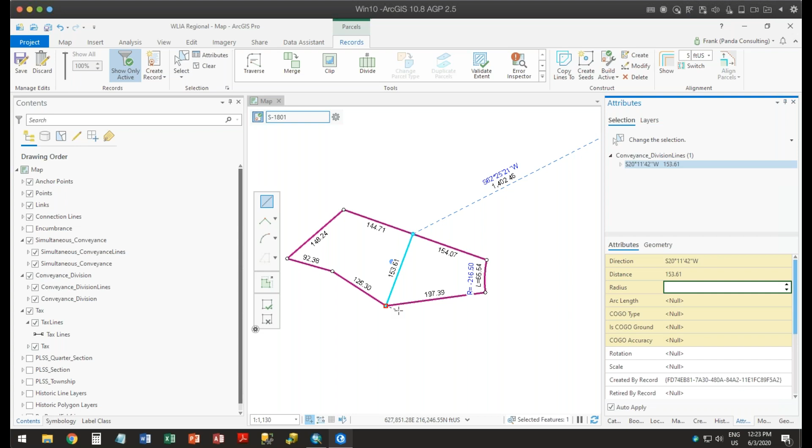20.1142. That's in a southwest direction. And my distance is 153.61 on here. All right. So one thing you will immediately see is that it actually allows me to build lines without actually having bearings and distances on them. I could just draw lines without having any COGO values on them, and it would store that.

In this case, because this is part of a plat of survey, I want to record that's what was shown on here. And if I wanted to, I could actually compare that to the actual length that's in here, 152.61. I also have in here whether this information is from measurements, whether it was inversed, whatever. So I have the ability to tell it what type of COGO values are stored.

Is it from the deed? Is it from measurements, or is it inversed, or is it calculations from the geometry, or is it something that was calculated when I did a clip? So I have those capabilities in here. I'm going to go in here and select everything as part of that record right now and just sort of go through here.

I've got simultaneous. I don't really want those in here. Here's my conveyance division lines. Here's my simultaneous conveyance point. Here's my connection lines. I really don't care about that. All right, so here is my lines for my lots. Here's my conveyance division seed at the moment. I'm going to tell it to create another seed for this one here.

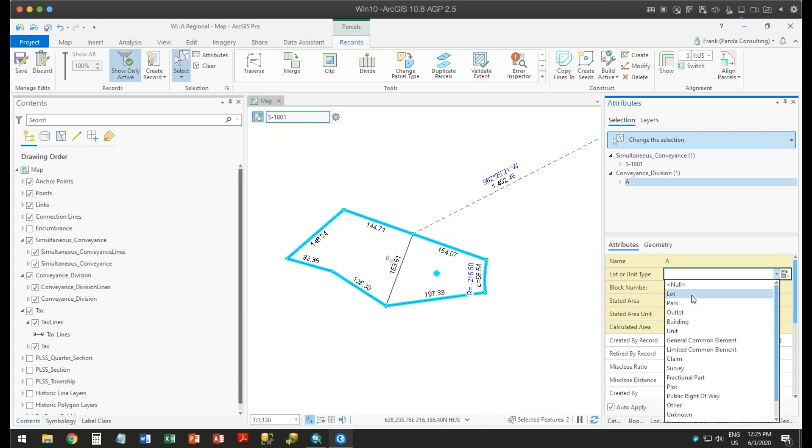Again, if I wanted to, I can go in here and say this seed right here, just to let you know, that's actually parcel B, and that is a lot. All right. And then I'm going to go back here and say, okay, now let's create the other seed. Let's select that other seed. That's parcel A, and that is also a lot. And say build this.

When I build it, it's going to build it and then turn on my display again, so it shows not just my active, but everything else on here. By the way, the one thing I forgot to do, I forgot to COGO join this to check and see how close it actually matched. Let's go in here and look. Ah, there is a little bit of difference. So let's go and do.

Frank, Mark also has a question. Yes, sir, Mark. When he digitized the conveyance line, he noticed that unlike ArcMap, ArcGIS Pro did not populate the bearing and distance from the digitized line. Is this an option? No, no. When you digitize a line, it basically records that that's a digitized line.

If I actually go into Traverse, and I'll do this when I'm done, when I go into the Traverse and digitize a line, it will record that bearing and distance that I digitized in brackets. And what that tells it is that this is not a real value. This is just sort of what you calculated. All right, and it doesn't store digitized values. It only shows them to you, so you can do a comparison to see what's going on here and that sort of thing.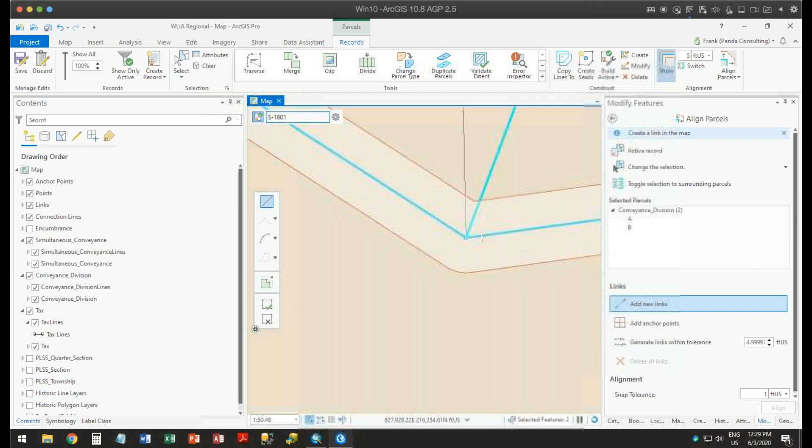So let me go in here and just see if any of these match. Nope. Nope, I can tell already. All right. So what I'm going to do is I'm going to go and do some links here. I'm going to say this actually goes over here. And it'll show me it's a hundredth off. Now, most of us as parcel mappers would say a hundredth really doesn't matter. But when you're doing validation using topology rules, it does. Those of us that have had to clean up hundreds, it actually does matter.

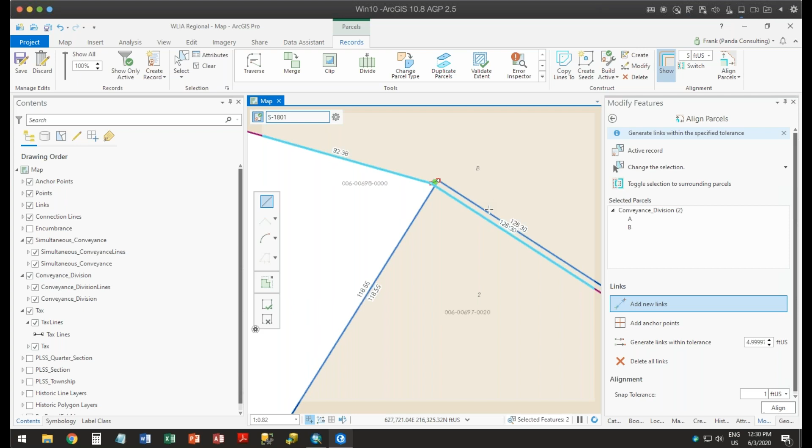All right, so there's the 3. I want to go and take my existing record and align all of them so they are coincident with those points. I want to move them. And one of the interesting things you're going to find is that it's actually going to move this point here, but it may not move my connection line. Let's go in and just check and see. It may not move the end of my connection line. One of the little idiosyncrasies of the way it's put in place right now.

All right. Frank, Mark wants to know, how do we know parcels are not joined correctly unless we significantly zoom into the points or run topology rules? Those are 2 ways. Right now, there is no way to go and tell it. For example, just like right now in ArcMap, there's no way to tell whether you joined it correctly until you actually go in and look at that. The difference is that you can run a topology rule, and if you have a topology rule that says you can't have gaps or overlaps, it will check that as an error.

But be careful, and we don't want to go too far down this rabbit hole, but by default, these layers do not have that topology rule that says you can't have gaps or overlaps. Because, for example, you might have stacked parcels and other things in here. So the topology rules, let's go down that rabbit hole. All right. Let's go in here and let's look at the topology rules for here.

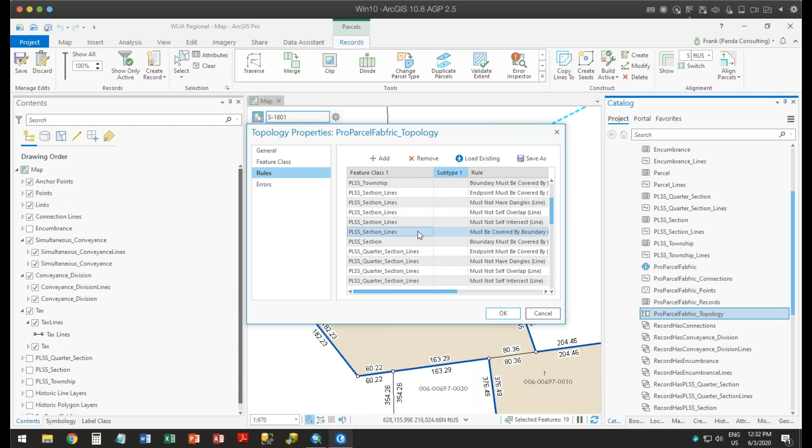But it doesn't have topology rules that say you can't have gaps between parcels and you can't have overlaps between parcels. That's not part of the standard rules. If you want to, you can put them in here. You can add them for whatever layer you want, but by default, that's not the topology that this is checking. It's not your grandfather's topology. This is the topology that says we're just going to verify that these parcels consist correctly in and of themselves. Okay.

So on that join, since I didn't have an anchor point, it didn't do anything, I bet. Yeah. All right, let me go back here. Let's go to move. So one of the things I'm discovering here as we're moving this and doing this more and more is that, this anchor point's here.

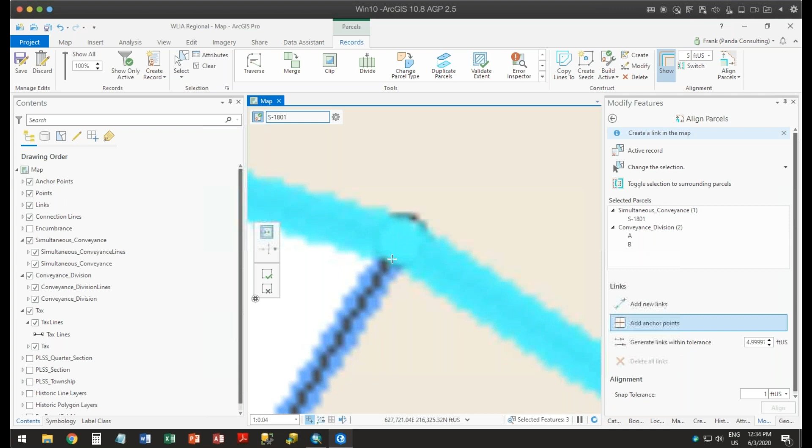Let's go put an anchor point there now. And one of the things I am discovering is that if you don't have an anchor point, the align doesn't work quite as well as you think it would. And interestingly, when I do that, it says, okay, that actually is where it's supposed to be.

Sorry, hopefully this doesn't make any of you sick zooming in and out like this.

When it was lined up like that, it actually was exactly where it should have been. So I don't need to do that align, once I moved it correctly to where it was. All right.

I've gone in, I've created the plat of survey, I've created the lots out of it. What's left for me to do now? To go and actually take this and copy it up to tax parcels. All right, so let me go and take lot B, lot A. All right, and now what I'm going to do is let me go and make this a little bit bigger so we can see these. I'm going to duplicate this.

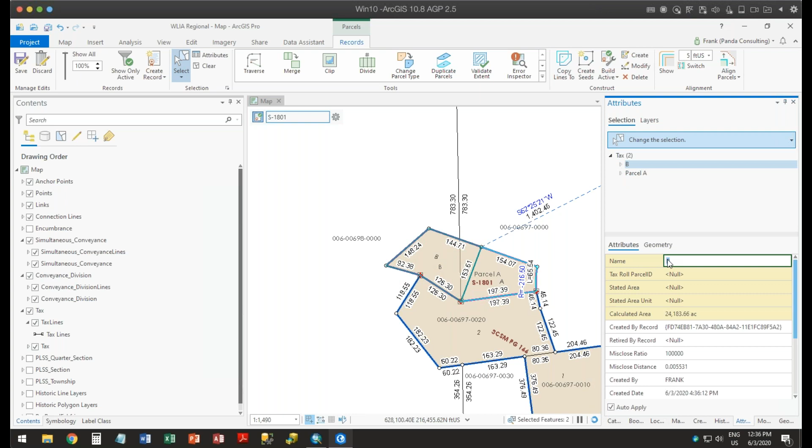So just as we did a duplicate on the lots in ArcMap, now we're going to do a duplicate over to the tax parcels and let it copy these two over into the tax parcels, right? Make sure we built them. And now we should have parcel A, parcel B, as we had before.

All right, so now let's turn these off. Let's turn our anchor points off too. All right, I now have select here, and let's do a clip and clip against the others. We don't care about this. And go ahead and there's our parcels that we want to clip and clip against these other two. There's that remainder, there's the other remainder. They are not attributed. That's the only thing that we found that is problematic about this.

So we did the same workflows. Again, it's within ArcGIS Parcel Fabric. You do the same function. It may not be quite as refined because you still have a couple more steps, but it's exactly the same thing as what we did in ArcMap Parcel Fabric.

So what other questions do we have on this? Anything? Does it look as easy? Does it look a little bit more complicated? What do we have here? Any questions on this? Nope. All right.

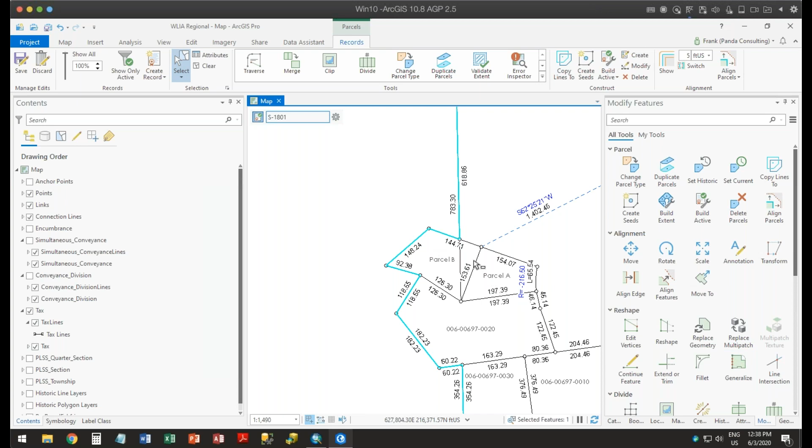Yeah, actually, that's not a bad topic though. Let's start with the move. When I did the move, I took everything that I had created as part of my active record. I took my plat of survey lines, the points that were built on that. I took my conveyance divisions, the lots that I created, those polygons and those lines. I selected them all and moved them all at one time. So I didn't make any real adjustments or changes in the geometry of those things.

And they had on them the record information about the bearings and the distances. The same way with this parcel down here on the south, that plat of survey and those lots all had their record bearings and distances on them. Now, the question was, which of these was right? I'm a surveyor. You get into real problems when you start asking me what's right and what's not right. In this case, I moved them and the angles were the same and the distances were the same.

So I didn't attempt to do any corrections to determine which was right or wrong, or any adjustments. I said, let's put those two together. They may say that they're different bearings, but I'm going to leave it at that because I just want to store a record of what those original plats of survey showed. I wasn't attempting to make any adjustments on the actual information shown on those original records, but I wanted to keep those and keep the mapping in place.

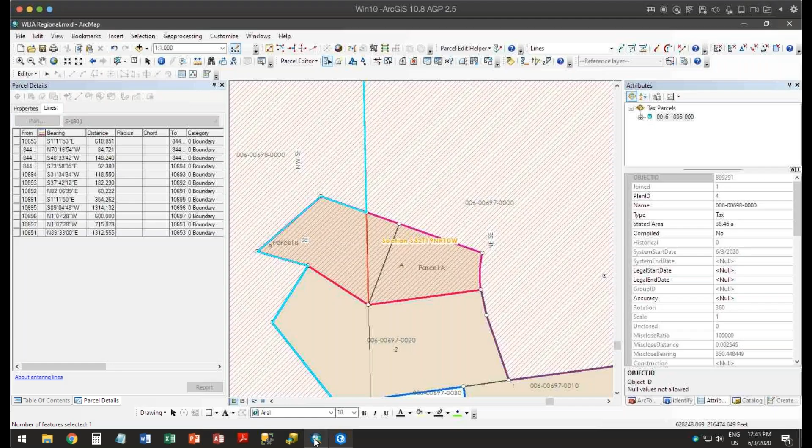Kim has a question. Yes. She's asking, is the relationship between the PLSS monumentation as control points different in the ArcGIS fabric than the old ArcMap fabric? That's a great question. It is different. It is very different. It is radically different.

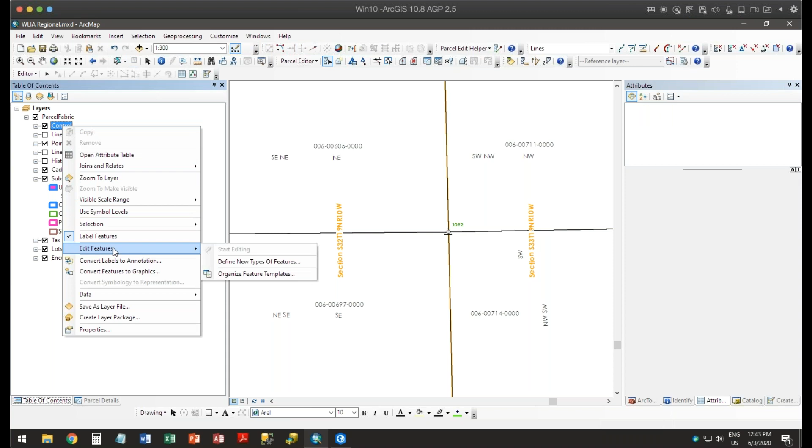So inside of the ArcMap parcel fabric, you have a separate feature class here called control points. These control points are basically standalone points that, in the normal sequence of operation, are never moved. They are never touched, never removed, never adjusted. Which is both good from a control point standpoint, but also problematic because there are some funky little idiosyncrasies.

For example, within the control points, it has an active field here. They've got aliases on in here, so I'm not quite sure exactly which thing I'm doing. Let's do an identify on this control point. What I have is the point ID. That point ID actually is an identification of the fabric point that's associated with it.

It says that the control point's located here, but there's a point within a certain tolerance that is associated with this point. That's this point ID, and it also has to do with whether or not it's active, whether it has a point associated with it or not. So if your control point has a point associated with it, it's marked as being active, and that point is then identified as it should be on top of that control point.

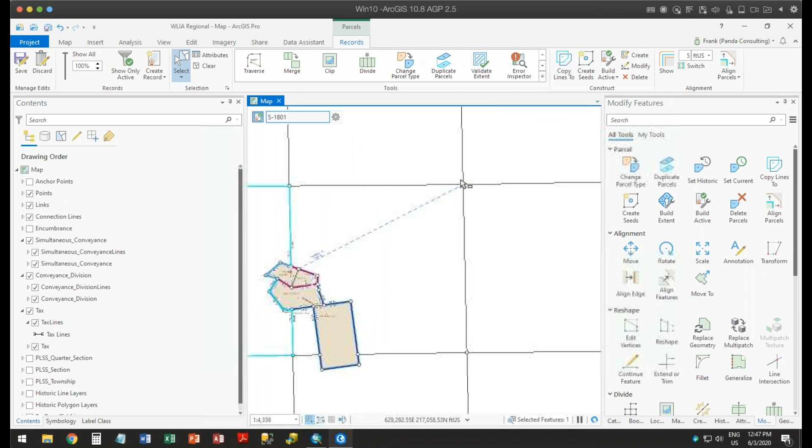ArcGIS parcel fabric. One of the things you'll note is that there is only one point feature class in here, and that point feature class has an attribute that says, is this point a fixed point or not? A fixed point is a control point. A non-fixed point is a normal point that you can move around.

So rather than having two different sets of these things, the ArcGIS parcel fabric has them stored as a single layer, and you can use a control point as the corner of your parcel. And if you update that control point, it automatically moves and your parcel will automatically be adjusted.

Matter of fact, in the next release of software, which I'm already beta testing, there is a function which allows you to apply an adjustment to your control points or update their values, and your points and parcels automatically move to correspond, because it utilizes the relationship built in through topology instead of individual links back and forth that often get confused. So, good question.

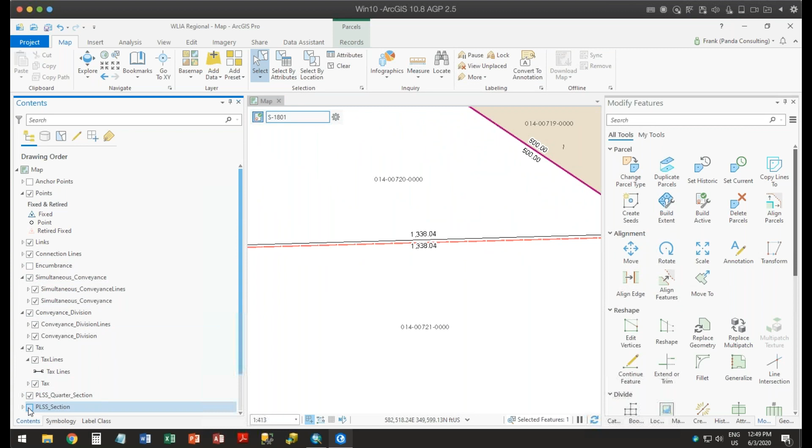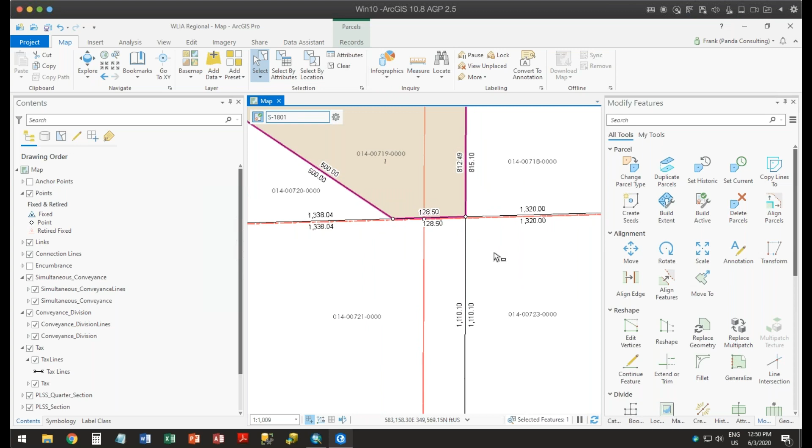All right, what I have here is the normal black and all the normal parcel information on here, and the red lines are denoting the PLSS breakdown. Just as an example, I'm not saying we should do this automatically, but if I need to adjust this because I have come up with a new solution for where these lines should be, the alignment tools inside of ArcGIS allow us to make these adjustments much faster, much better.

So I'm going to go in and make this adjustment and move these parcels down to the new line here. And again, you're going to see me using that same function in here. The first thing I'm going to do is close out, and I'm not going to make this part of a record. This is just going to be normal cleanup on here.

And then I can use this tool here, which is the Align Features tool, and say, let's see what this difference is. Let's draw, let's get in here. Let's go to here. Let's go to here. And let's go to here. Let's make this a little bit bigger to show that it's actually inside that buffer. Keep that rounded so it gets that one. And show you some of these alignment functions in here.

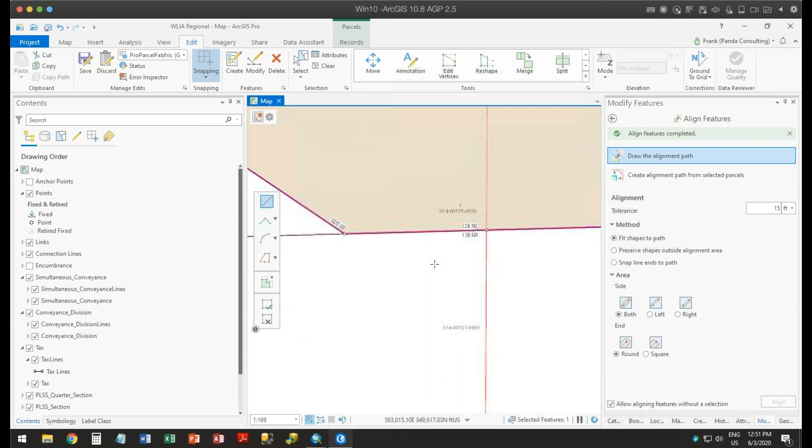So if I have to go and fix this, again, I demonstrated at the end of the break fixing the curves. Well, this is fixing the alignment, and it's the same sort of thing. Let's go and fix that so that these parcels now are coincident with that sectional breakdown that I have better confidence in. It's better information. All right. So there are good alignment tools inside of ArcGIS Pro. Doing that in ArcMap is definitely not trivial. There's a lot of issues on there.

So again, there's some great tools inside of ArcGIS for doing the mapping. The workflows are almost identical. There's still some things that I want to continue to push to have put in there, for example, things like copying attribution and all of that stuff. But you can see the potential there. There's a lot of flexibility in how you go and implement ArcGIS.

The key to this, and those of you who have come to my workshops and seminars and presentations for the last couple of years know that I keep harping on this. The key to success with the ArcGIS Parcel Fabric is just learning the standard ArcGIS tools. That's really it. You have to learn these tools and know what you have to use and how you use them, because there is an awful lot of flexibility.